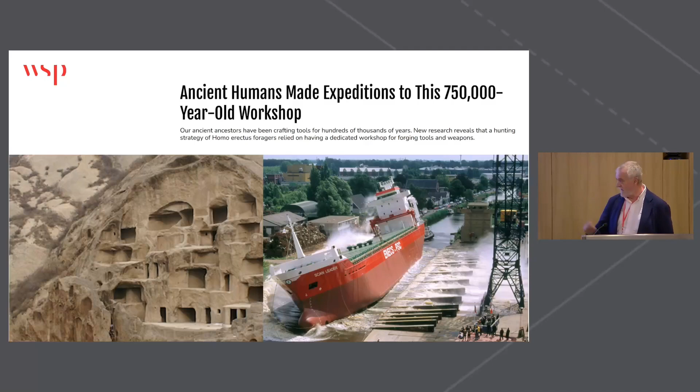I think sometimes we don't unpack why it's so difficult to transform our project process. So I'm going to come on to all of that before I hand over. At the very end of this, we will end up with some real nuts and bolts, but first we've got to start really high with some of the work that we're doing.

You've obviously just spoken about AI. I think the timeframes will be much faster than you think, actually. But for us, the first thing that we need to do is change the way we make buildings. We've been constructing buildings for thousands of years. We have to change that as engineers.

And sorry, I should have confessed at the start, I am an architect, so, like the fox in the hen house here. But anyway, we need to change the way we design our buildings using industrialized construction, but it's not going to be optimizing construction. It's going to be quite different, and that's what Matt and I are going to show you shortly.

Because we do not have the skills to construct into the future, we need to resolve productivity in our sector to drive economic benefits. And of course, we've got demographic change. A lot of the skilled craftspeople out there are retiring. There is no one to replace them.

So lots of reasons. But here's the rub, before AI kicks in, the big shift that we're going to see, and you will see over your career, is a shift from projects to programs. We are working with a number of clients, so this is not the future, this is today for us. In fact, with the work that Matt and I are doing, moving to programs is the past.

We're doing a program of work for the Environment Agency. The whole goal is what's the minimum that we can do on a project to make this work. So the sort of project that Matt's going to show, we're mobilizing at a program level, multiple projects using the same kits of parts.

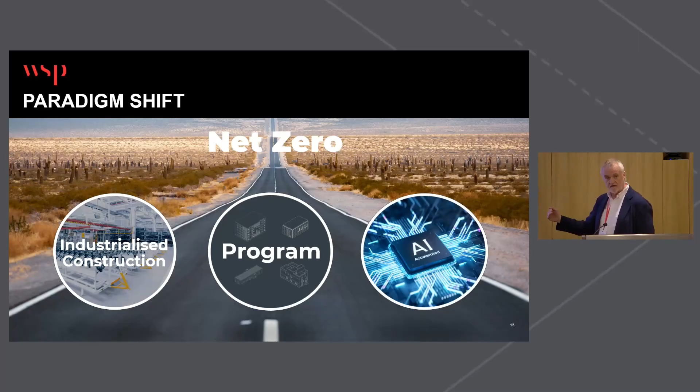And then finally, of course, we are doing lots of foundational stuff on AI today, but we don't think it will really kick in from a transformation point until about 5 years' time. But in 5 years' time, it will be transformative.

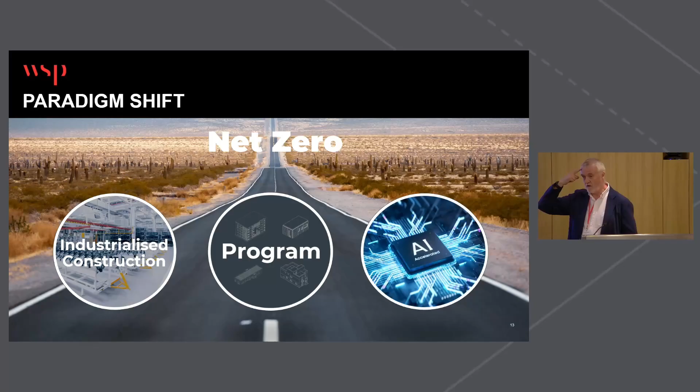Today, most of our buildings are designed from here. This knowledge will be transferred to expert systems, but I think five years is a long game. That's transformative, because then all of a sudden for us, we have 73,000 brains we can take into a room for a meeting. Not one, 73,000. That's how profound the change is going to be.

So our kits of parts approach is really about shifting from briefing, design and construction. Now, a lot of you will have heard of designing for manufacture and assembly, and I'm going to come on to this at the end of the segue. It's not the same thing. It doesn't slip in between design and construction.

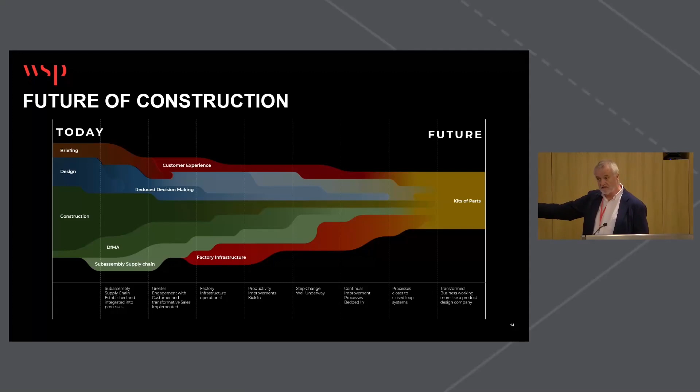It's very different. In some countries, we're mobilizing factories, and I'm going to come back to that. We're certainly setting up new supply chains to make the big things that we're designing. But as I say, the key thing for us is we've got to resolve this productivity gap. Manufacturing has had huge productivity benefits from digital, IoT, cloud technologies, and so on. We need to achieve that.

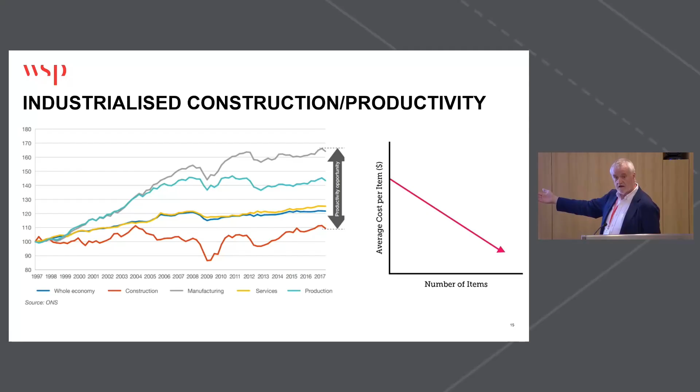And of course, one of the ways is aggregation of projects. So, again, that's your program. Because economics are simple. The more I make something, the cheaper it gets. So that's dead simple.

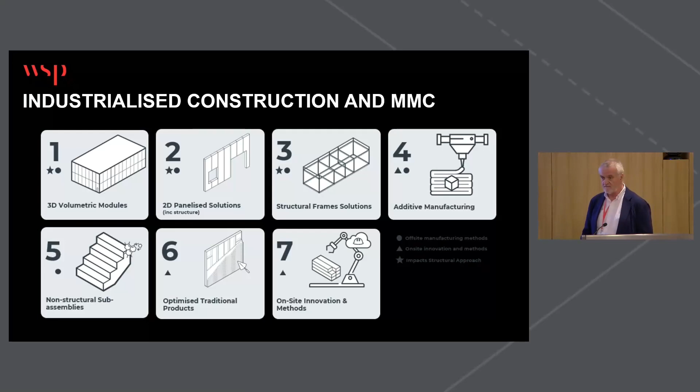And of course, we've got 7 MMC technologies. If you don't know these, Google them and you'll get them. And there's lots of benefits to industrialized construction. For me, there's no downsides. You think from a safety point of view, and Matt's going to come on to that, I don't see any downsides.

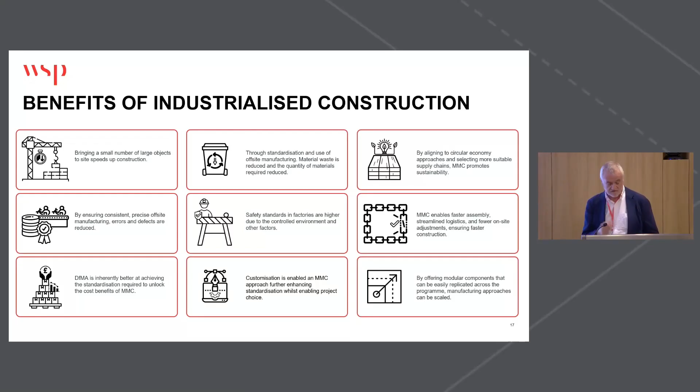Now, one of the key things for us is those technologies, we find our secret sauce, I would say, is that we do not preempt what solution is going to work for a program of projects for a client. We use design to tease it out. So on our data centers, we're doing a lot of the powertrains, for example, using category 1.

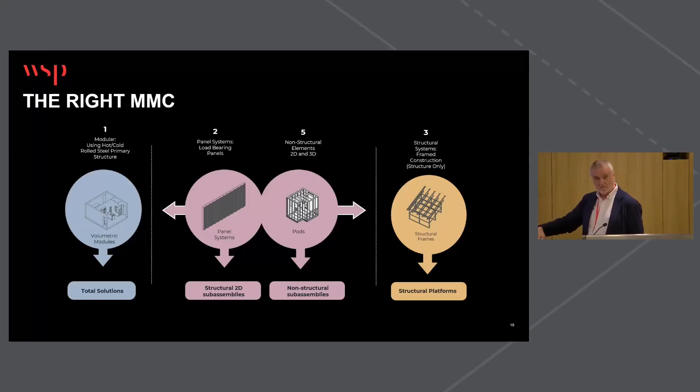On data centers and some of the work that Matt's going to show you, we're using category 2. We use a lot of category 5. So right from the outset of a project, we're looking to find the right technology.

A good example here is a project we're doing with Laing O'Rourke and Foster's, where we're trying to tease out what is the right solution. Today, we would do everything on-site. Maybe in the future, everything's off-site. But we're trying to figure out what is the right solution today as we move to new supply chains.

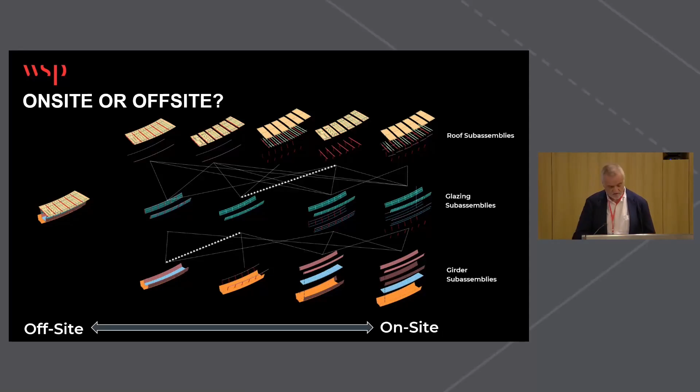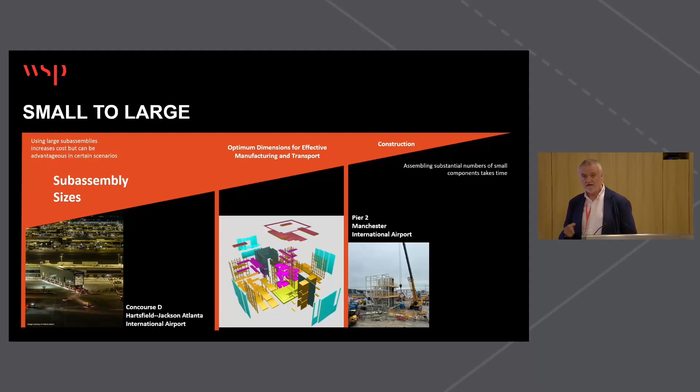The key thing for us, which Matt's going to show you, so I'm not going to steal his thunder, is that it's all about getting the smallest number of easily transportable components. Our team understands logistics inside out, craneage and so on, so we've got crane drivers in the room at the concept phase.

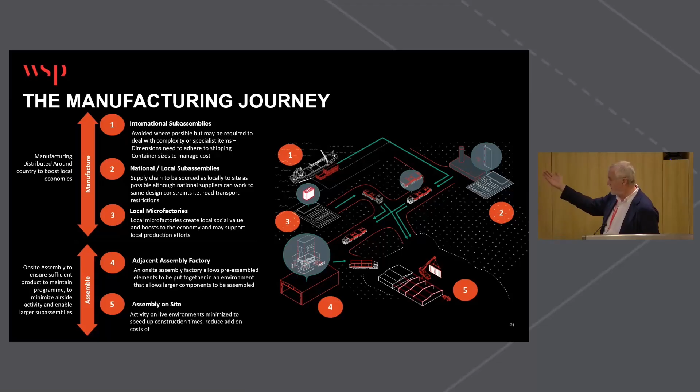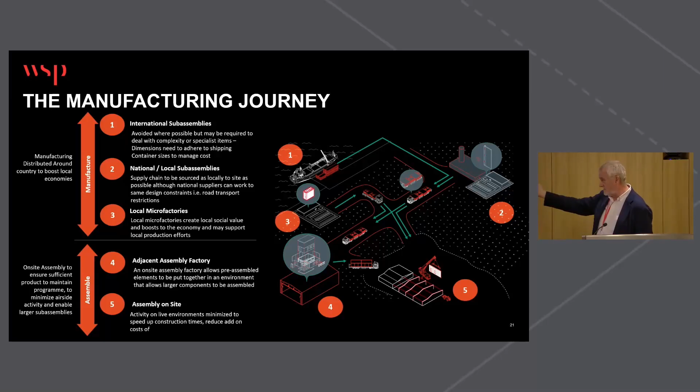Now that we're making buildings using really big things, I've got to think about how they come. Are they coming in internationally, nationally, or locally? We're seeing trends like microfactories - the World Economic Forum sees that as one of the biggest changes. And on some projects like Manchester, we've got a facility on site, so that whole journey of the product to the site becomes really important.

I've got a project in Toronto just now, and we've got a meeting with a client this afternoon. That's one of the first big things - how do we get the things to site? How do we crane them in? Are we going to use a helicopter, or a train to bring them in? So all these sorts of conversations.

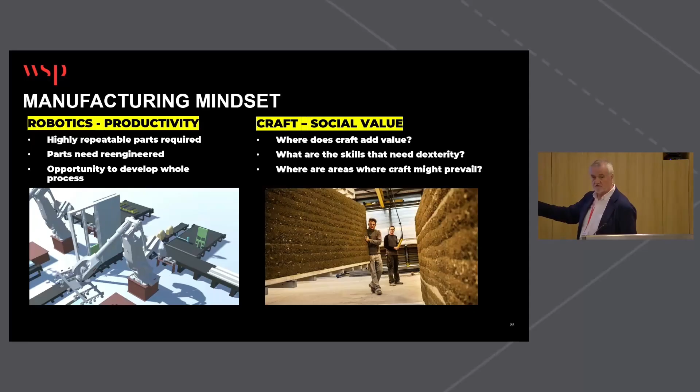The big shift we need to make as professionals is we currently think like contractors, we think like construction. We're all going to have to change our mindset to that of a manufacturer, and trust me, it's very different - quite happy to discuss that in the break. It's a very different mindset to think like a manufacturer and how to use robots, but the whole industry needs to change. There's some amazing opportunities - it's much safer doing things in the factory.

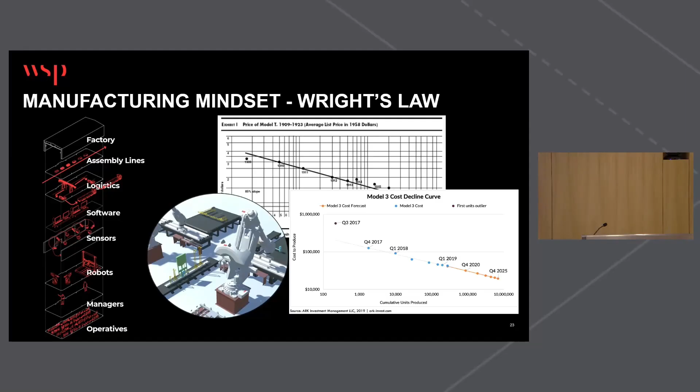As we start to look at things, this is Wright's law, which you can Google. I don't have time today to dwell on this story, but the whole point is we're not even at the top of this curve. This is Wright's law, as Henry Ford made more and more Model T Fords, the price got cheaper and cheaper. Same model applied to Tesla - we're not even there. So if we can get our industry onto this curve of aggregation and making things in the factory, we will get the price point of our buildings down below current prices.

This is one that really excites me. Think about it - London has £35 billion of construction output a year. If you take a third of that outside London, imagine what that would be like in the tube in the morning - you've got a third less construction workers, and all the accommodation they stay in is freed up. But more importantly, we're shifting all that effort into the factories. We can drive social value - people can cycle to work every day.

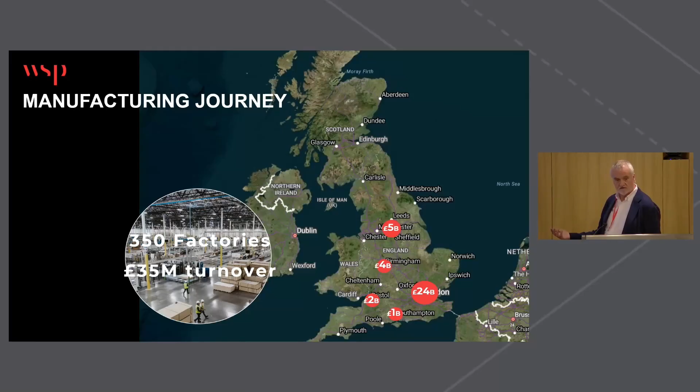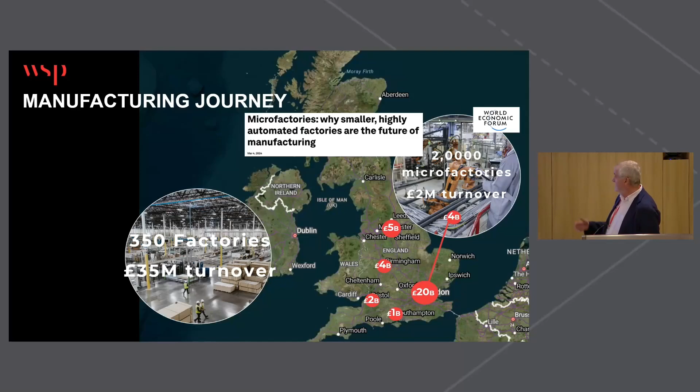We're doing some work on High Speed 2 just now, and this thought of taking workers 20, 30 miles to a really remote site just to put some cables together - it's bonkers. We want to do them in a factory where they can work close to their community. So we see this shift driving massive change and social value propositions as we move from construction to manufacturing at scale, and maybe lots more microfactories.

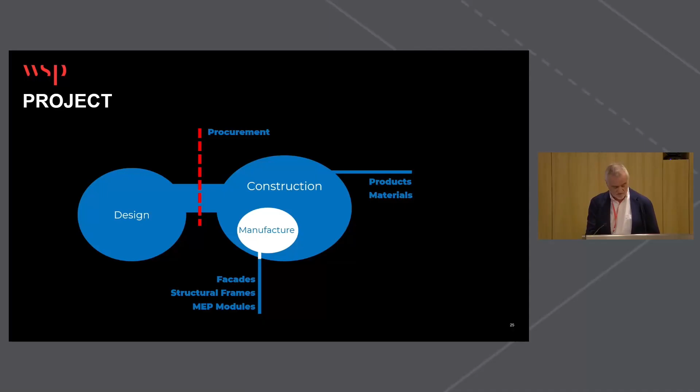I want to quickly hand over to Matt, but finally, this is what we do today - we design for construction, we subset small parts to the factory, we do one-off shop drawings every time. It's not the future for sure. But the future really is about once we create this content.

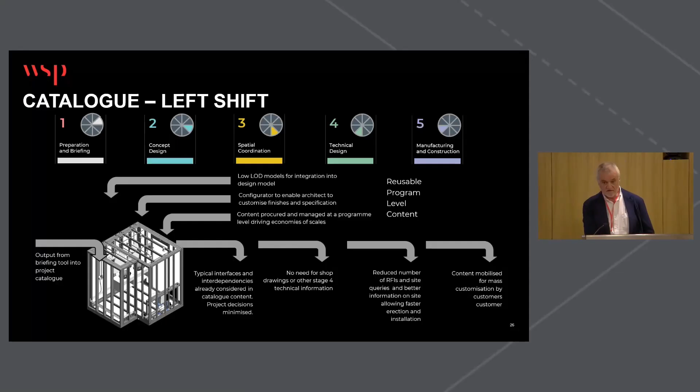Once we work in a program, Project 1, I now have my fabrication-ready content, and I just use it. So I can now seamlessly, in Project 2, use configurators - we can move through the design process super fast, I already have my shop drawings. Some of our other projects after Manchester, we're designing them in weeks now, and they're taking like 15 days to be put up on site. So that is the future, and the real part of this future is really around that shift from projects to programs, and the shift to design-to-manufacturing, which is very different. We're subsetting construction, thinking like manufacturers, procurement at program level, so we can now automate all the way through.

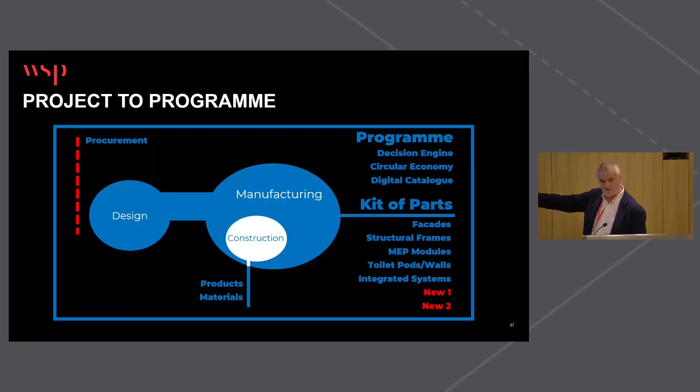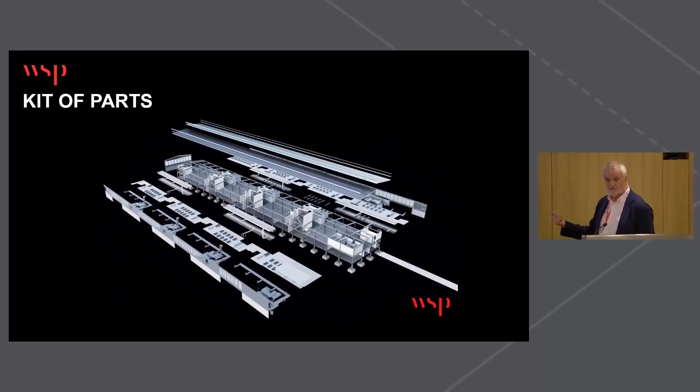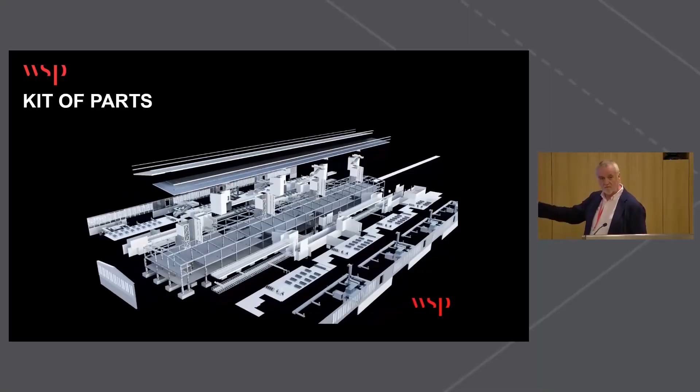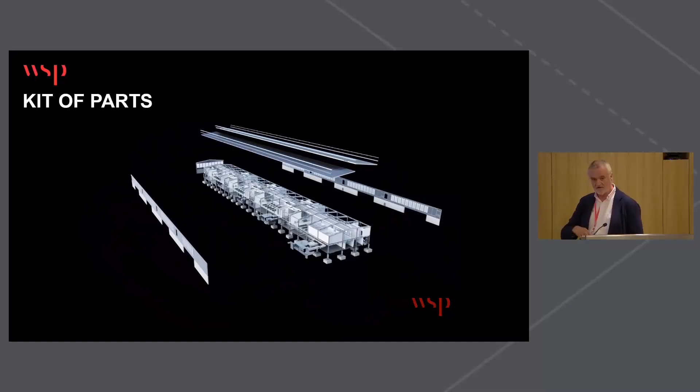And of course, we've got lots of tools that we're developing to drive that digital process. We've been doing this for 4 years. This was a proof of concept we developed for Mace 4 years ago for an aviation pier, and it was game-changing for us because within weeks of doing a design using our technologies, we can do a full bill of materials. The structural frame has to be calculated, but it's calculated from a kit of parts. We have the beam we're going to use already in our catalogue. We're not designing a 500mm deep beam then going to the fabricator. We're using the fabricator's information, doing our calculations, and then doing the bill of materials.

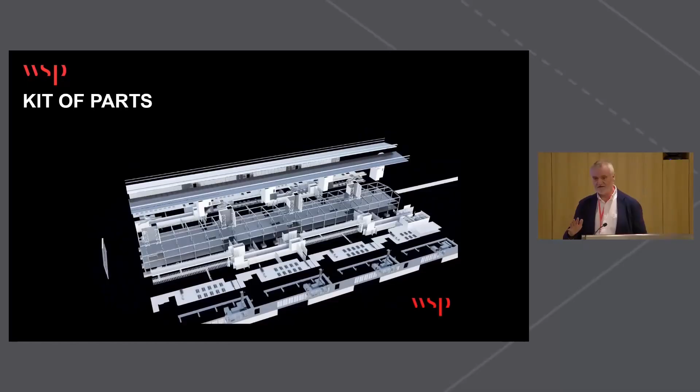So that's some of the concept, trying to keep it high level, but certainly we see the future for you. I'm so excited for your generation, actually. It's going to be amazing, shifting away from construction into manufacturing. And Matt's now going to show you that it's not just theory, that it's actually been taken right down to the nuts and bolts level. Thank you.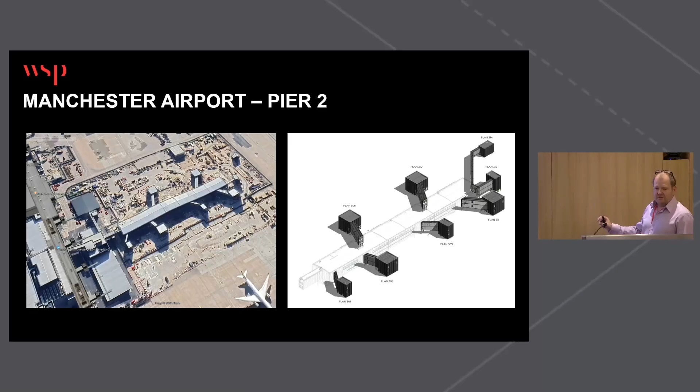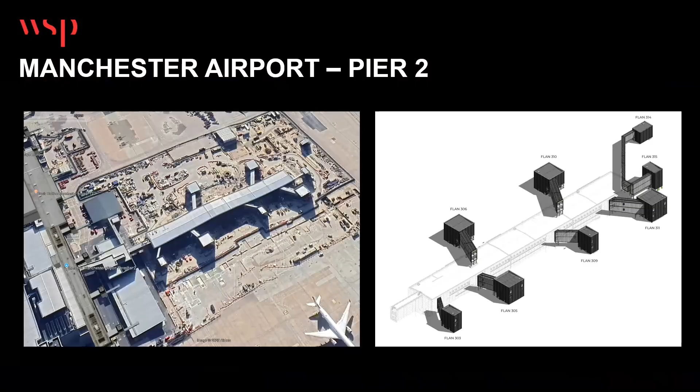So this is the project we're going to talk about. We're not talking about the entire airport, we're talking about a small section of a project to rebuild Pier 2. The kit of parts element to that project, which WSP delivered, was the nodes and the fixed link bridges which link the pier to the aeroplanes via sky bridges. You can see on the slide here there's repetition, which is key for kit of parts for the viability. There's repetition on this project, but this infrastructure is also common to other airports. So there's a potential benefit for MAG, the owners of Manchester, who also own Stansted and East Midlands, and also other airport operators to use a similar approach.

So we're going to talk about the delivery of the kit of parts today and some of the practical issues around that. I'm going to focus on the nodes rather than the fixed link bridges, just because of time pressures. So going back to buildability, ask yourselves: what are the benefits that buildability brings? I'm going to try and give a balanced argument here. There are no real downsides to this stuff, but there are challenges, and it's going to change the way we work, the skills we need as structural engineers, and the conversations we have during project delivery.

So a smaller number of components coming to site, but those components are inevitably larger. We've got smaller site teams. You could see that negatively and say that's fewer jobs in the communities, but construction's statistics in terms of health, well-being and mental health are pretty dire - that's a subject for another debate probably - but it's a lot healthier for people generally. For me, working in an office is pretty straightforward, but for the majority of people who work in the UK construction industry, it's a pretty nomadic, uncertain life, staying away from home for long periods. So there are definitely big benefits from moving that workforce into more permanent locations.

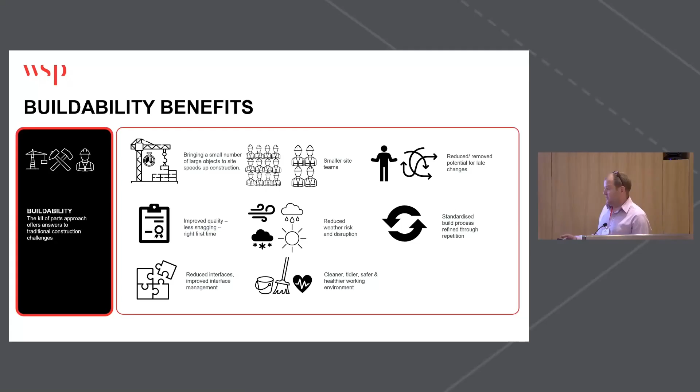Less change during the construction stage, which is a real problem for productivity, budget control and programme management. Improved quality as well. These are all things that have been talked about throughout my career, starting with the Egan report, which led to NEC contracts - it was all built around these things. Less weather risk and potential disruption because you're doing things in controlled environmental conditions. You're standardising the build process, so you're getting progressive improvements through repetition. There's fewer interfaces, and those interfaces get resolved in a different way once you've got that manufacturing mindset embedded. So on site, you're not interfacing between different designs by different people, relying on coordination that occurred during that process. And it's a cleaner, safer, tidier work environment.

Talking about the challenges briefly: you do have to accept that with this stuff there are higher consequences of errors generally, because you're making bigger stuff. If it's wrong, it can be a big problem. You're handling large elements, which logistically is challenging - transporting and lifting large elements is obviously going to be a little bit more complicated.

Knowledge and experience, that's why we're here. The reality is that manufacturing mindset and that knowledge of kit of parts and the expertise in handling large components is not something we've got a huge amount of knowledge of within the construction industry. We need to consider how we address that.

Supply chain capacity, another key issue. We talked about transportation and getting a bit more technical.

Load paths. Think about structural load paths in a design. Traditional construction is pretty straightforward in the sense that you build the structure kind of aligned with the load path, slightly in reverse - the foundations go in, and so on. You have to recognise that with kit of parts, the load paths are very dynamic, so they're moving around all the time.

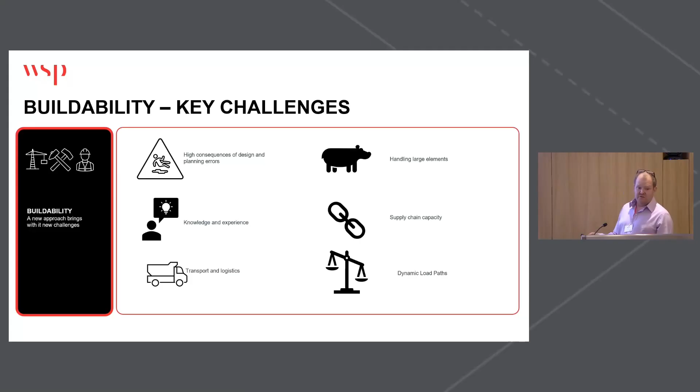During the manufacturing process, during the assembly process on site, reverse stress can mean all sorts of different things in kit of parts, and you have to be aware and alert to that. So, response to challenges - again, just some key takeaway points.

Digital rehearsals, mock-ups and prototypes. When you're building stuff, when you're designing stuff for production at scale, you can potentially spend more time and effort and invest more in prototypes and mock-ups.

Supply chain engagement, really important. Make sure that the supply chain is capable of delivering what you're designing. Share experience, ask questions, and don't just talk to other people in the construction industry - build knowledge and competence in that.

So we've got to invest as an industry in that knowledge. Where do we gain it from? Do we talk to the shipping industry, shipbuilding, for example? That's one thing that I've got in my head as somewhere we need to go.

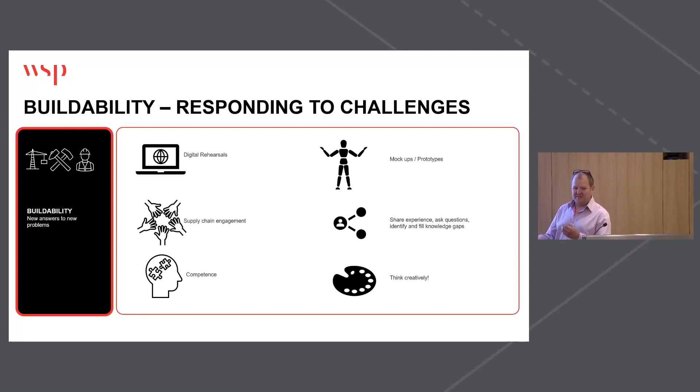And be creative. Don't think that kit of parts is boring in the sense that you just design a panel and put it together like a Meccano set or a Lego model. There's all sorts of challenges which require creativity - a different kind of creativity sometimes. We're not making bespoke buildings or tailor-made suits, but there's a lot of creativity still required. So that plays to us.

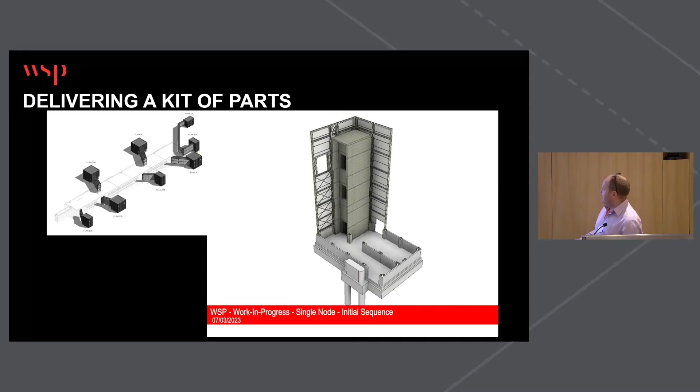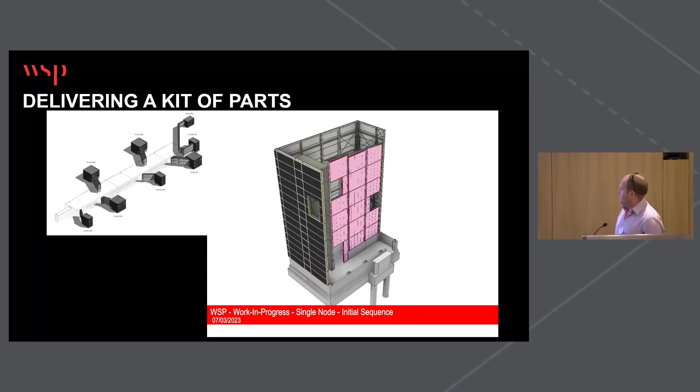This is the digital rehearsal that we did for the kit of parts for the Manchester Airport node, panelised construction, precast concrete lift shafts, and it gets put together in sequence. So what happens at the end is ultimately the staircase gets dropped in through the roof and the roof gets put on.

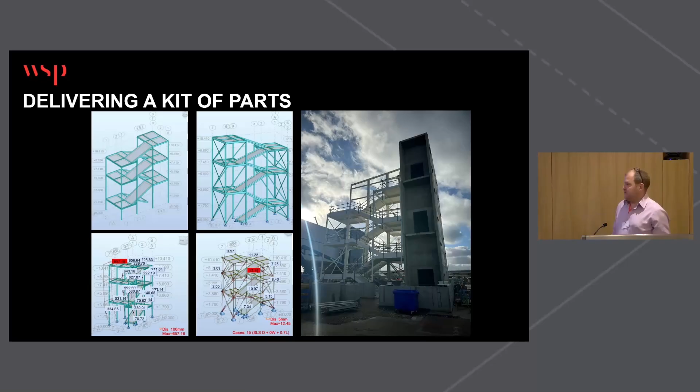In the event, we worked through that and decided on a different approach because of the temporary works associated with that sequence we saw, and we redesigned the staircase to act as a temporary stability mechanism, so we could avoid the need for big raking struts all around the perimeter of the building during construction, which in an airport and a constrained site was going to be quite problematic.

Talking about health and safety - again, Dale's already mentioned the health and safety benefits, so I'll flick over that. I'm just going to talk about additional considerations that engineers need to bring to this.

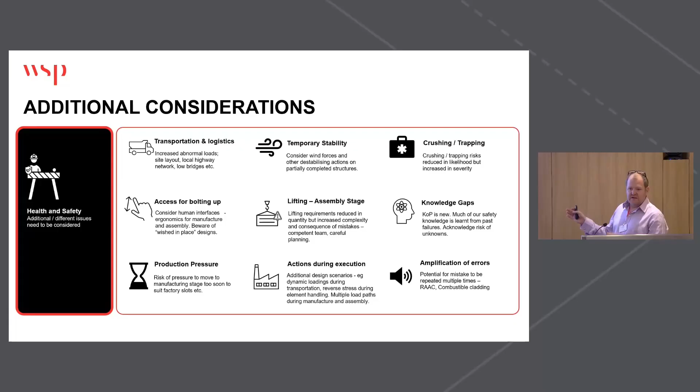Transportation and logistics - you have to think about how you're going to get your big components to site, so that's something you might not be used to doing. Temporary stability of structures in their partly assembled state, destabilising actions, crushing and trapping, injuries and incidents with large components if you're not handling them correctly - you need to consider all of that.

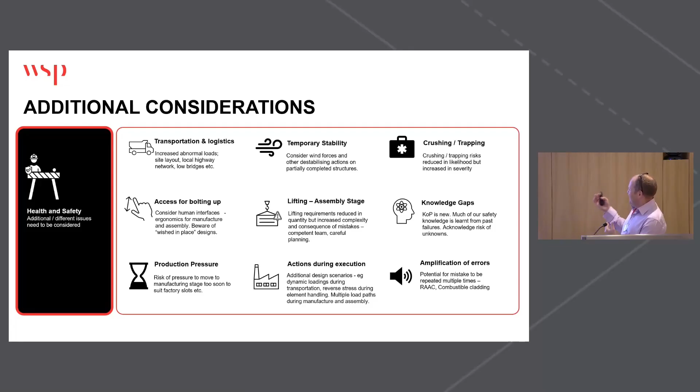Sorry, I'm rushing through this now, but we'll come back to it in the Q&A.

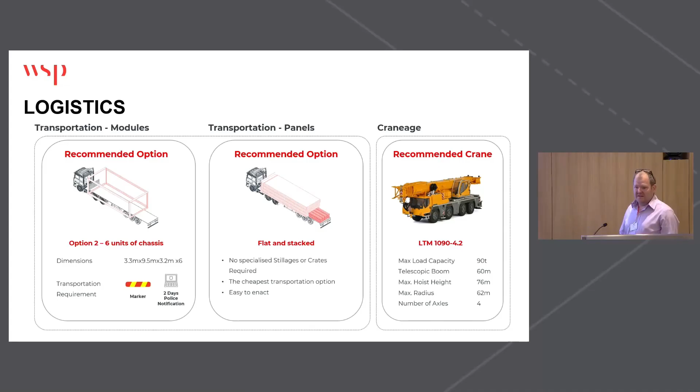So logistics - these are the kind of considerations required: types of crane, the way you transport, size of the transport. Get to know the general restrictions for abnormal loads.

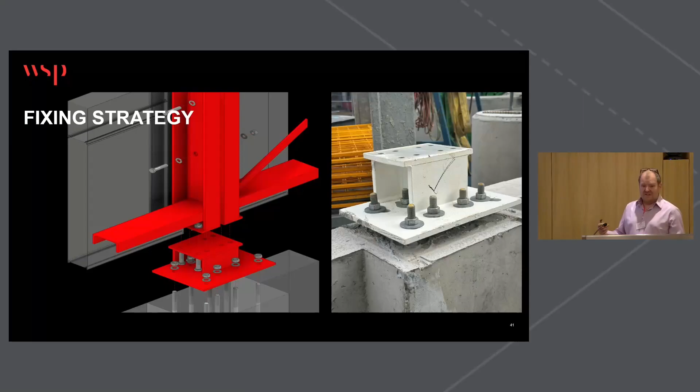But just be aware that there are human beings involved in this process at the end on the site, and that has to be thought about. That was one point I didn't cover in health and safety - ergonomics, really thinking about the detail of how the connection is bolted up, how you can get your hand in to tighten a bolt. Until I got involved in kit of parts construction, I'd only touched on this very briefly in design. In kit of parts, it's a big part of what you need to think about.